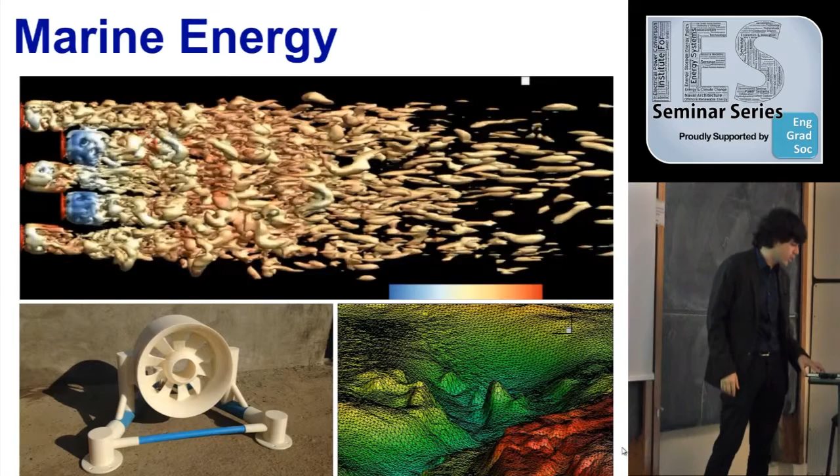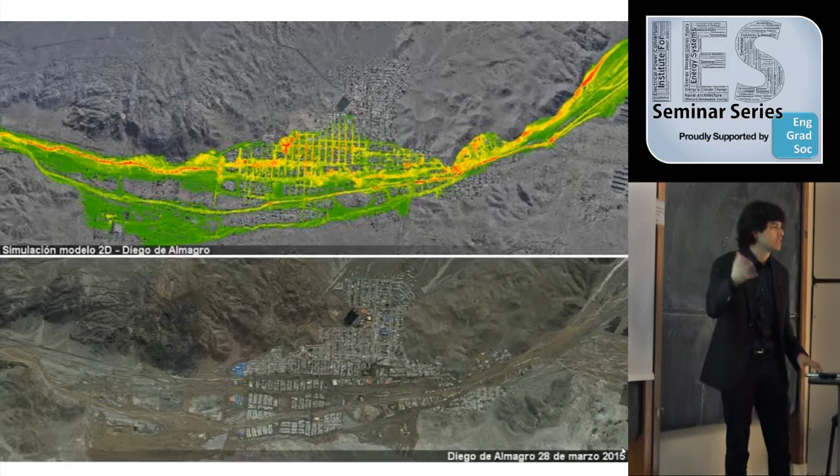So we did some forensic work to try to understand what had happened, from the meteorological point of view up to the propagation of the flood in the terrain. We have done some very cool experiments trying to understand the process, why all these towns got flooded, and what the consequences are. And this is the work we had initially planned. We have developed models to couple sediment transport and see how the city of Santiago is going to flood the next time something big comes.

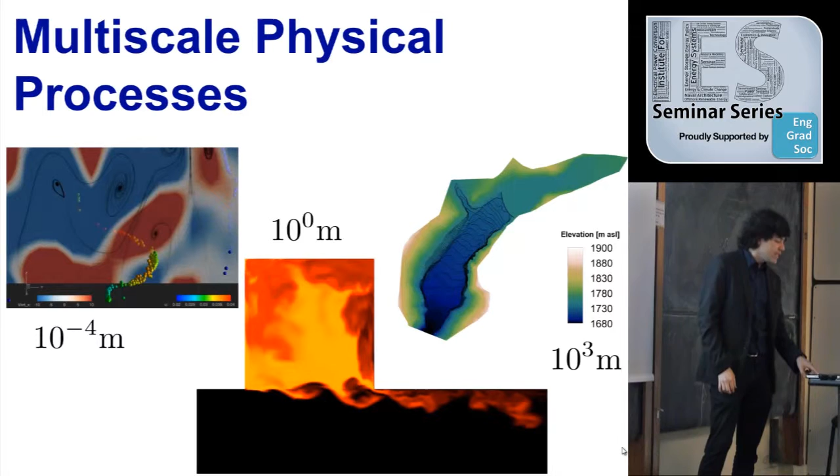So all this about particles started a long time ago. When I was doing my PhD, this was just my hobby. I started just because I liked it. I started investigating particle motion in flows that occur at low Reynolds numbers but have chaotic properties. This is not turbulence. These are even steady flows. Very simple flows, called von Karman flows, in which you have the lids in a cylinder rotating in different directions.

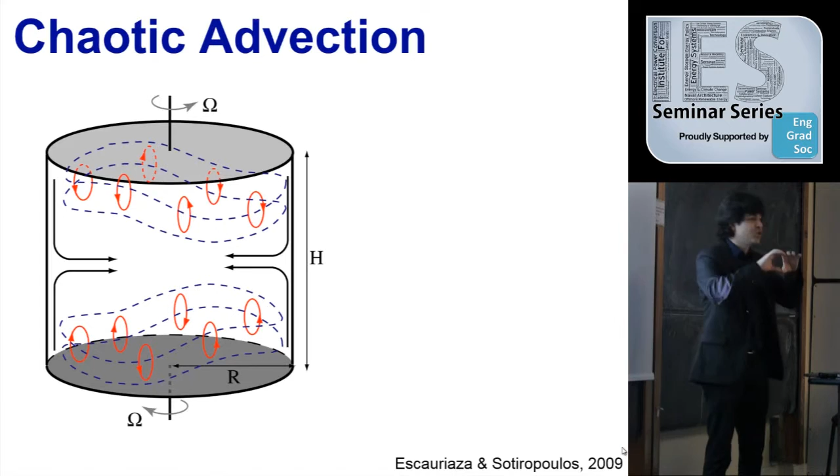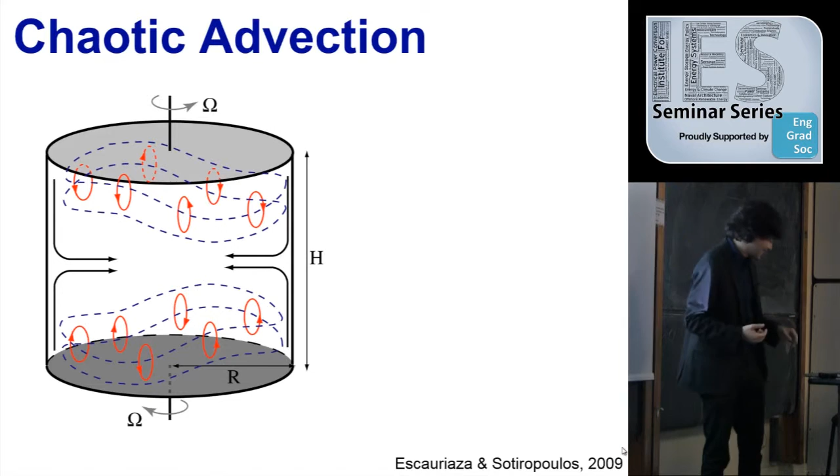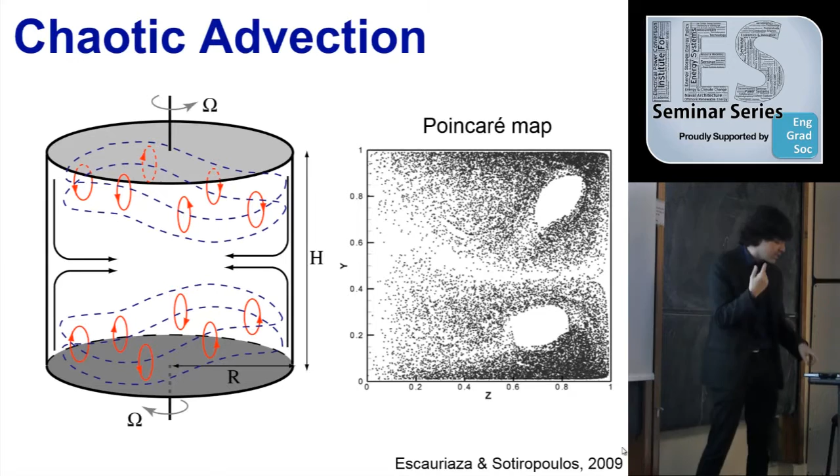So at some point, for a low Reynolds number, you develop this donut type of vortices, right? So the way of analyzing these flows is Lagrangian. So I started looking into, this had nothing to do with my thesis or what I was doing, I started looking at Lagrangian dynamics of particles in these chaotically advected flows. And you can start seeing, when you plot these Poincaré maps, every time a particle pierces this plane, you start seeing where the particles go, right?

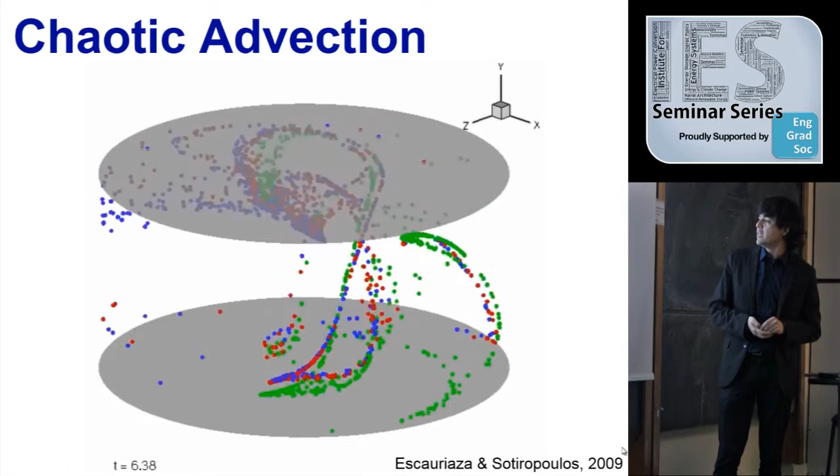So here I put particles of fluid, which are the blue particles, and the green and red have different properties in terms of inertia and weight. And you can see that there are some areas of the flow that have a large mixing capacity, even though it's not turbulence. And so you can use these flows to mix with great efficiency, even though you cannot produce turbulence.

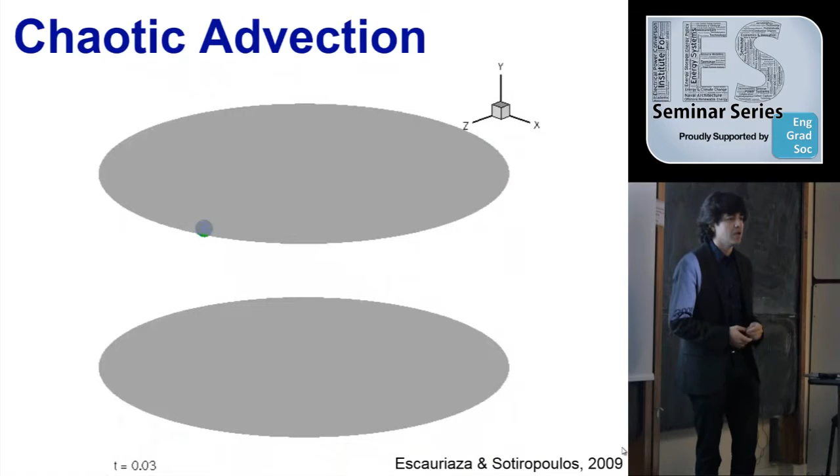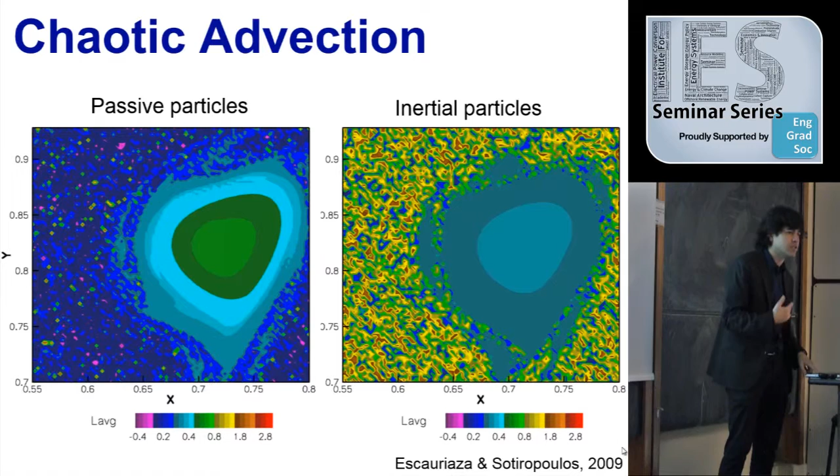So these toroidal vortices, these donuts, are a barrier to transport. So you can see that there are some integrable areas with no mixing in between this chaotic sea. Right? So we started looking into the dynamics of particles and how inertia and gravity produce changes in the dynamics of particles in these cases.

So then one of the things that we did, that's why the hybrid model started, the DES model started, is to look at the horseshoe vortex, which is the vortex that develops when you have a turbulent boundary layer and an obstacle, like a pile or something like that. The dynamics of this vortex, especially at high Reynolds numbers, is very, very complex.

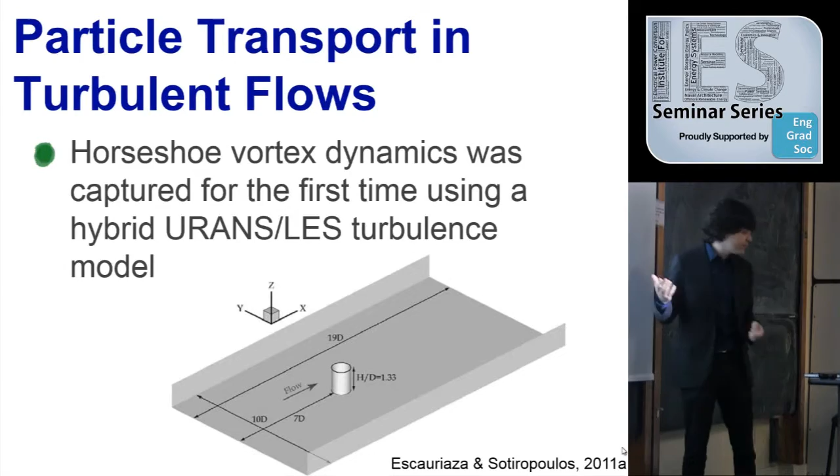And the only way to resolve this at real-life Reynolds numbers was to use a hybrid model, so we didn't have to resolve the tiny vortices of the boundary layer, but at the same time capture the dynamics of the vortex. So for the first time, using DES, we were able to understand the dynamics of the horseshoe vortex, which is comprised of several vortices that actually merge.

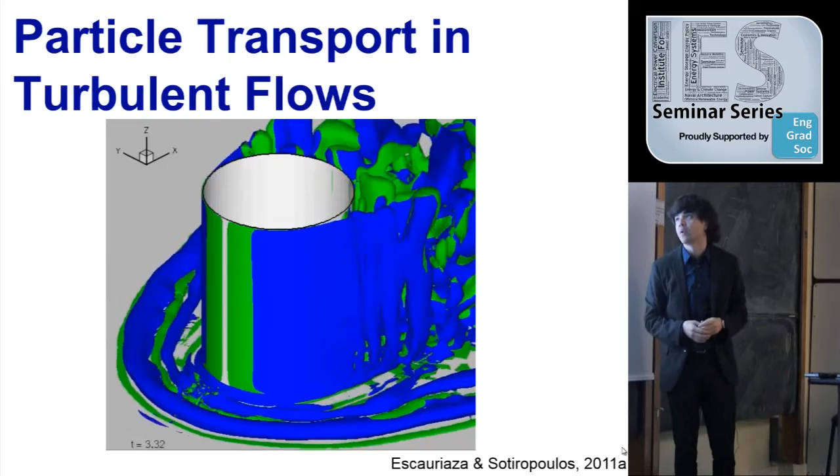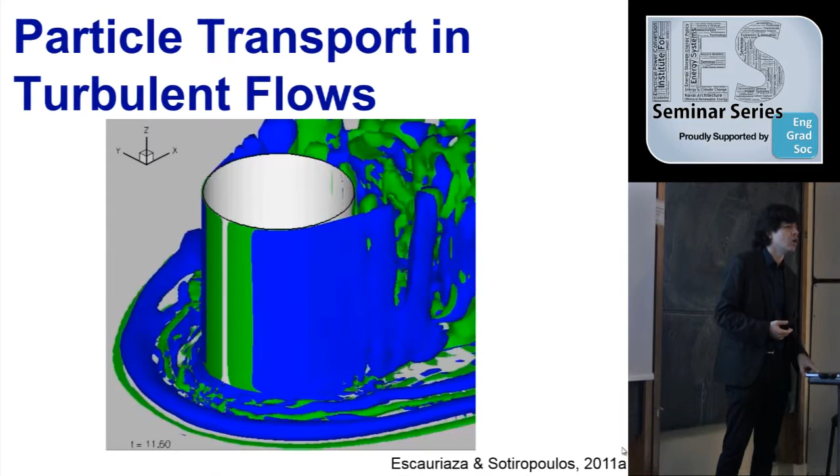In fact, there are some experiments in the 70s in the St. Anthony Falls lab at the University of Minnesota. There were experiments for a very, very low Shields parameter, and they waited a month, and you still had sediment transport.

So all this time, from the early 20th century, there has been this controversy between this vision, which is mostly what Bagnold and other people have developed, and Hans Albert Einstein, or Einstein Jr.'s vision, which is, you have to look at this problem as a probability problem. So what I did was I started looking into the dynamics of particles.

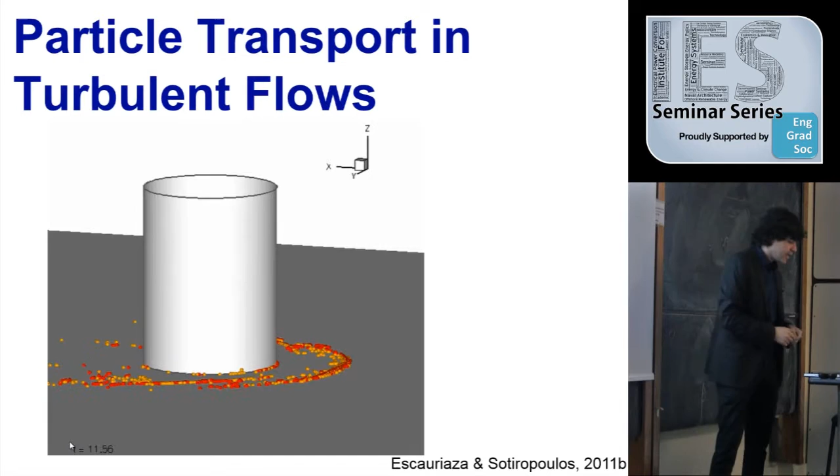So if we perform this simulation, you will see that the horseshoe vortex can actually transport the particles downstream, right? And move them. Obviously, the particles that get in the area outside the horseshoe vortex will not move because the turbulent boundary layer is not capable of mobilizing them. So one of the things that we realized is that, first of all, the transport becomes very intermittent. We're very close to the threshold of motion, to this critical Shields stress.

So groups of particles, and this is just a static figure to show you, groups of particles get detached and move, but sometimes nothing happens. There are particles that just slide on the bed or just remain there for a long, long time. And also, you get these streaks, which we were also able to reproduce, that a lot of experiments had seen: these particles get aligned on top of the bed under these conditions.

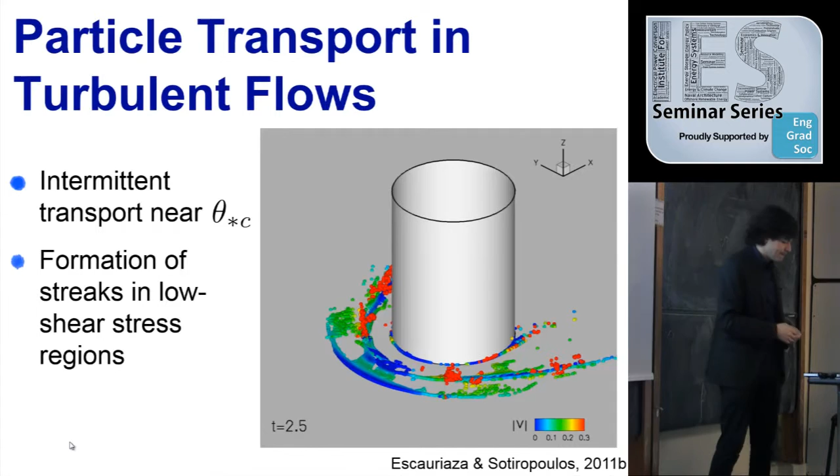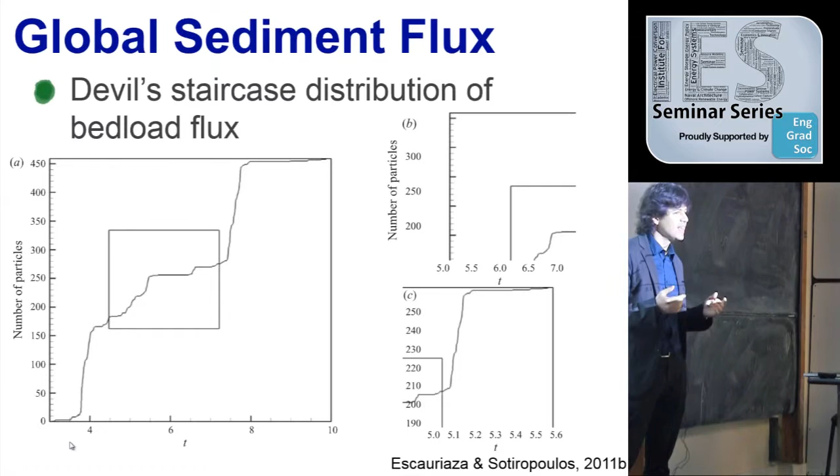So we decided to start counting particles. We defined a vertical plane and started counting how many particles cross that plane. What was the transport? Because that's what you actually can measure in the lab. And if you look at that, you see that there are huge transport events, but then there are periods where nothing happens. Silence. No particles are transported. Then you have smaller transport events, and then long periods where nothing happens, and everything is intermittent. And if you look closer at this, you see the self-similarity up to the resolution of one particle.

This is actually a well-known fractal curve based on the Cantor set. It's called the Devil's Staircase.

And I got really happy, because I work at the Catholic University of Chile and I get to work with the devil. So it's a lot of fun. This is the devil.

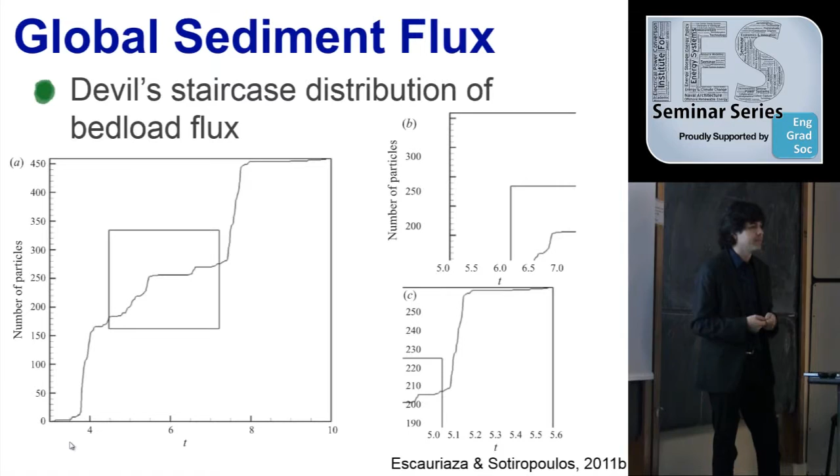You cannot actually fit a statistical distribution to this type of curves, right? It's a fractal, self-similar curve. So one of the things that we realize is that near the threshold of motion, bedload is very intermittent. If you look at what you actually can measure in the lab, bedload is very intermittent. These are the most common conditions in nature. You don't have a sheet flow of the entire bed all the time. Most of the time, the rivers are maintaining this condition very close to the critical.

And what happens really happens at different time scales and spatial scales, from the scale of the particle up to the formation of bed forms and all that. I don't have time right now to tell you, but from this Lagrangian analysis, we developed an Eulerian version of the same thing, and for the first time we coupled the bed with the horseshoe vortex, and we resolved bed forms for the first time in a 3D model. I can talk about that later, but it's not the purpose of this talk.

So now we wanted to understand what happens when you don't have a cylinder, but still the boundary layer can transport sediment. So the main objectives of this investigation were to understand the dynamics of the turbulent boundary layer and the interaction of the particles in a mobile bed. Now the boundary layer is performing the transport, not the horseshoe vortex, and we try to understand what are the mechanisms that produce intermittency and characterize the bedload flux in these conditions.

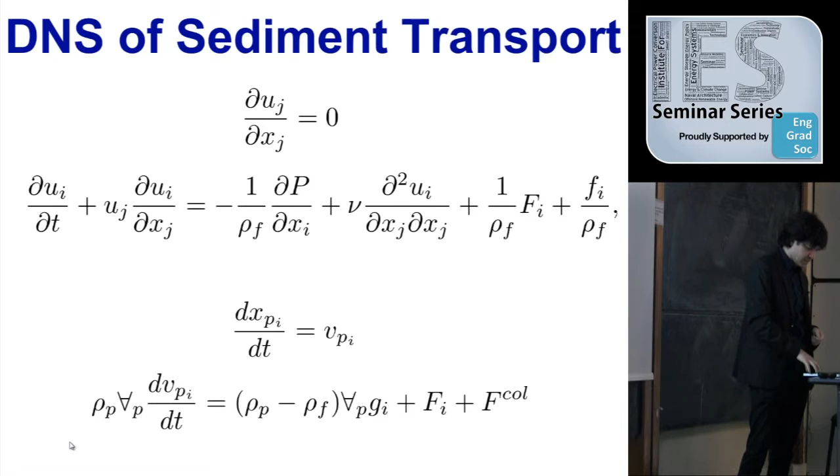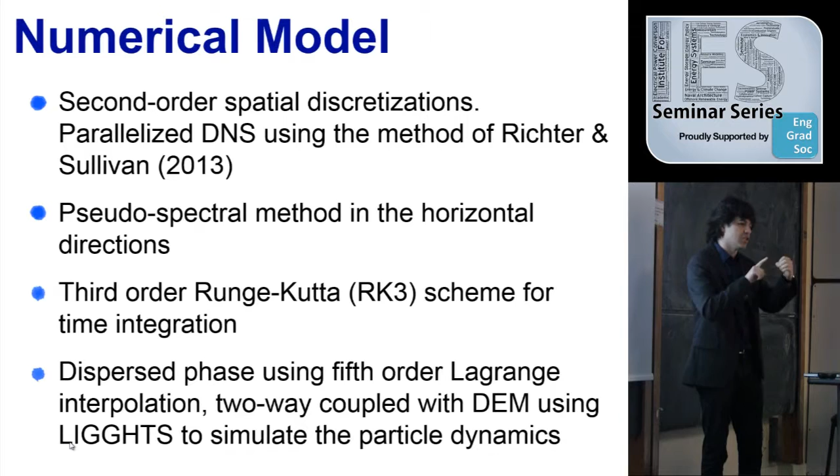So we developed this DNS model based on the method of Richter and Sullivan, which considers the spectral method in the horizontal directions and finite volume in the vertical. And in time we use a third-order Runge-Kutta scheme, and the particles are calculated with a fifth-order Lagrangian polynomial interpolation, and we use DEM, in which we consider the collision among particles with a scheme that dissipates the energy and gives you what happens after a collision in the tangential and normal direction.

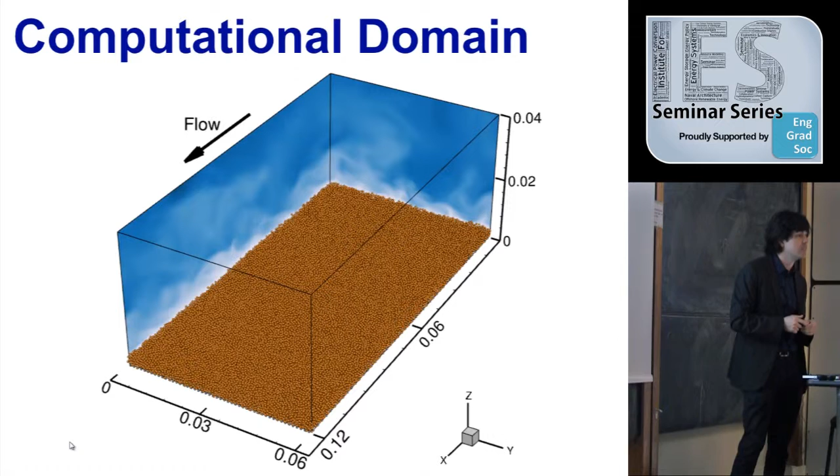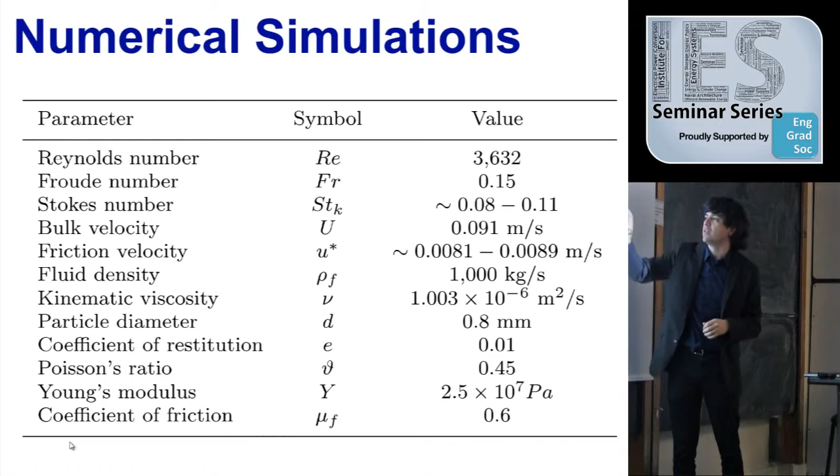So the simulations we carry out were in a very... DNS is very, very expensive. So this is the largest domain we could handle, 4 centimeters tall. These are the horizontal directions, and we have 50,000 particles in this case, just laid on the bed, right? So under these conditions, we can only get to a Reynolds number of around 3600. These are the other conditions of the particles, the coefficient of restitution and Poisson of the particles' collisions, the density of the particles on the fluid, the Stokes number, and all the characteristics that define this case in particular.

So what we tried to do was to, this is again the Shields diagram. Don't care about this. This was only just to check how the model was working. But we fixed the Reynolds number of the particles, and we tried different values of the Shields number around the curve given by Shields.

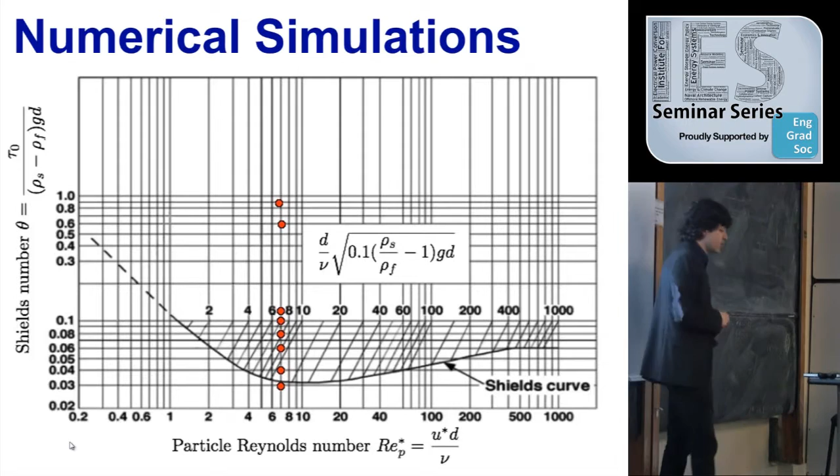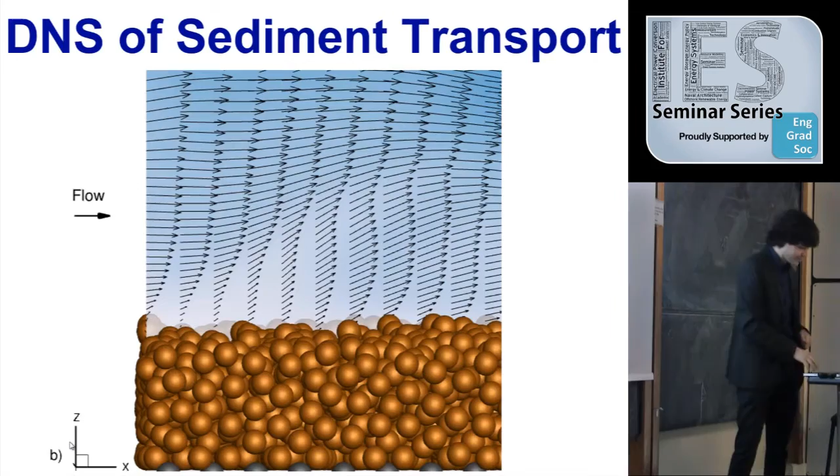So in each flow, we resolve the flow on top of this particle layer, and actually see what happens. I forgot to tell you, but the lateral boundary conditions are all periodic. So any particle that comes out gets seen immediately upstream. Right? It's like modeling a small stump on a riverbed. So we can resolve now. This was one of the first simulations we carried out. The next one you're going to see is

this is faster, because it's really boring to see particles moving every 2 minutes. But what happens is that the particles get trapped in these protective pockets inside the bed. So they start vibrating, and then they jump, and you see how this intermittent bedload transport develops. So we were able to look now at the coupled flow and particles. All the particles that are gray are not moving, have zero velocity. So when you have these hairpin vortices developing at the boundary layer, when they get up, they allow faster fluid to rush near the bed. So you have this transport event in which groups of particles are transported downstream as the flow develops.

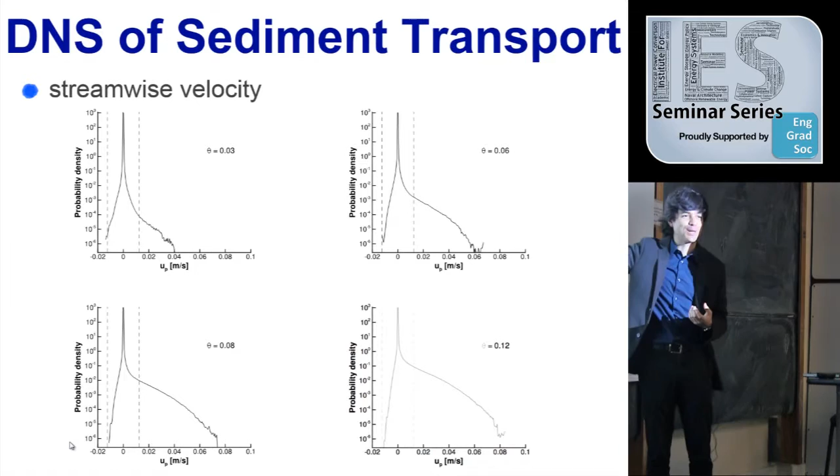So, oops, it doesn't show very well, but this is for different Shields parameters. We started looking into the statistics of particles, seeing how the streamwise velocity of the particles started increasing as a function of the Shields parameter. You will see here that we had to set up a threshold to analyze this, because negative velocity is when the particles start bouncing before jumping. So the backward motion of the particle is captured by the histogram in this case. Then we have what is called the activity on the bed, which is the total number of particles in motion at every instant in time.

The thing is that Albert Shields left his thesis abandoned in Germany, and then Hunter Rouse, who was the director of the lab in Iowa, found it, translated it, and made it famous. Everyone now uses the Shields diagram, and Shields didn't even know. He knew many, many years later.

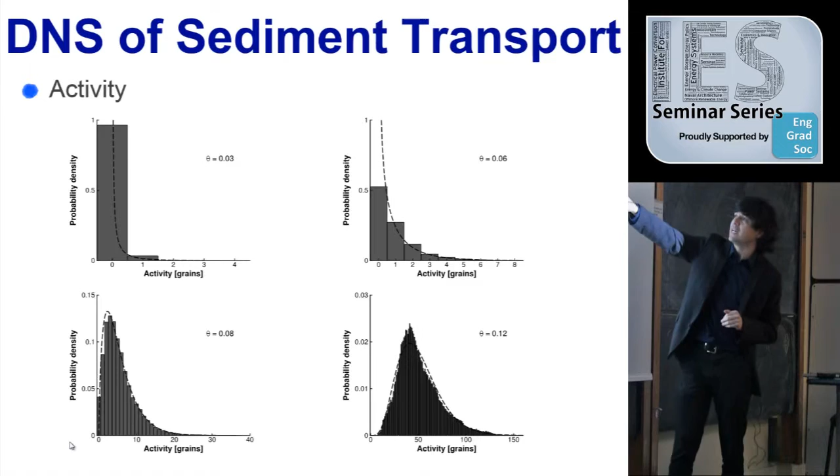So I imagine Shields defining at what point you decide that this is the initiation of motion, right? When the first particle moves, or when a significant number of particles are moving, or when the entire bed is moving. That's really difficult to define. Actually, I really think it's impossible in this case. But you start seeing how the behavior changes. When the Shields parameter is very low, basically no particles are moving at the same time on the bed. As the Shields number increases, you start having a distribution of particles that are moving.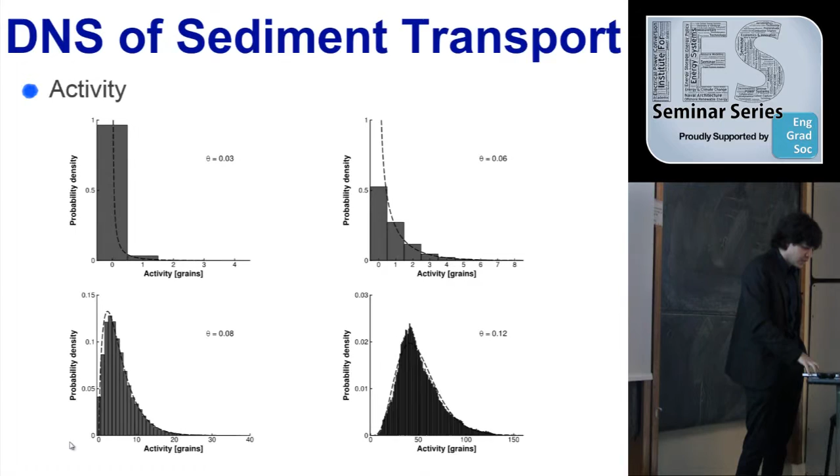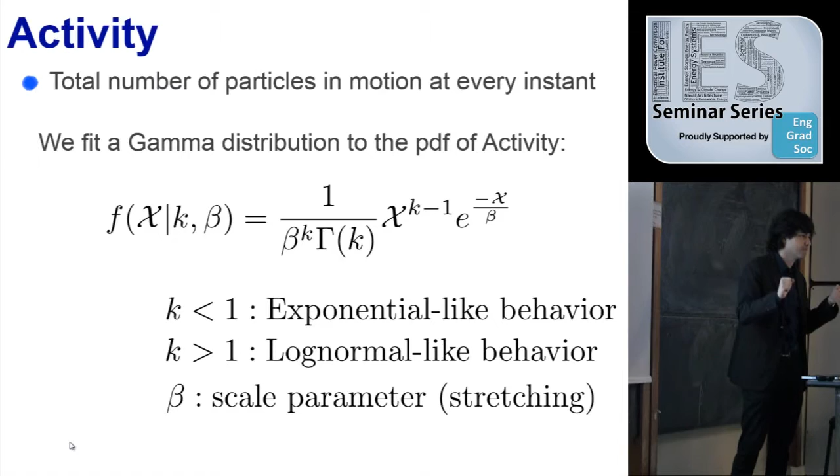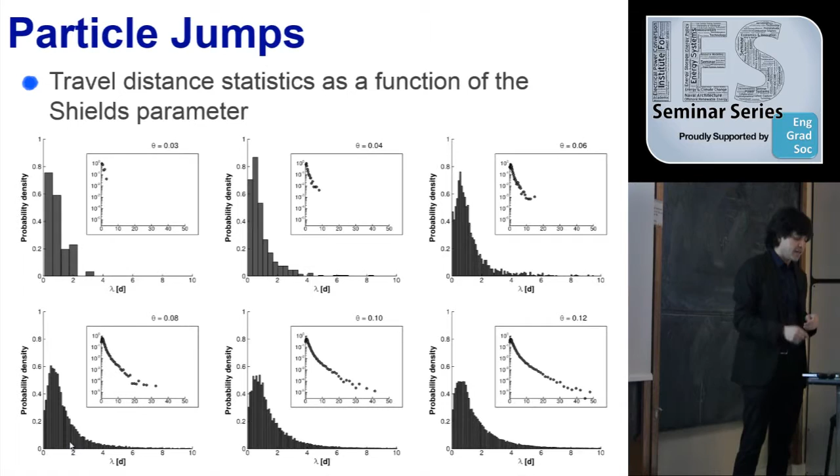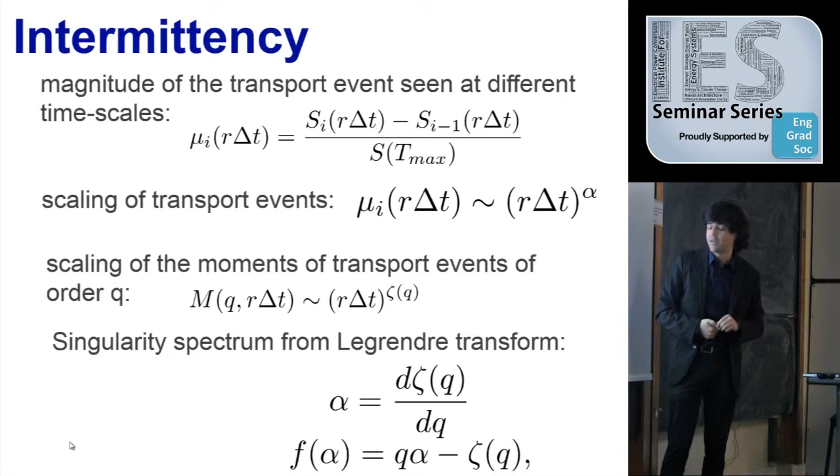So if you define the magnitude of an event as the mass between two steps of the staircase, you can analyze this at different time scales, and you can see if there's a scaling relationship. Actually, this is what is called the fractal dimension of the transport event magnitude. The moments of this transport event magnitude are related to what is called the multifractal spectrum of transport. The moments are related to the singularity of the multifractal spectrum through what is called the Legendre transform.

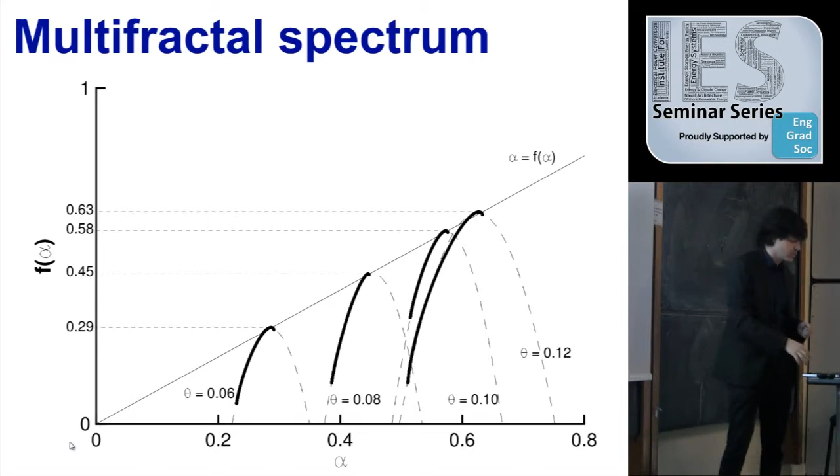So it's really difficult to identify initiation of motion, but at least you can say it will be in an intermittent regime, or you will always have one particle exiting. It will seem continuous, which means that the fractal dimension is equal to 1, at least in these conditions.

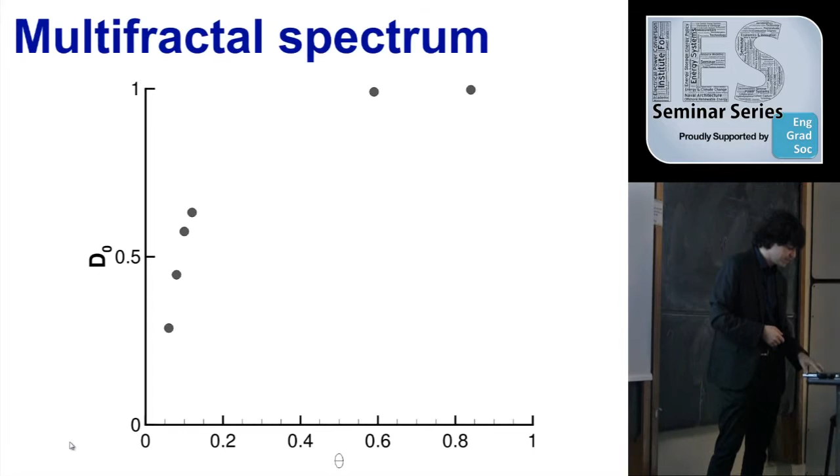So in conclusion, we used a two-way coupling in which we combine DNS and DEM to analyze the dynamics of sediment transport, try to characterize the transport with the Shields parameter, and see how the properties of the sediment flux change under these conditions, with different characteristics through which we can describe the sediment transport flux. And this is actually the first time that we have been able to connect all these loose ends.

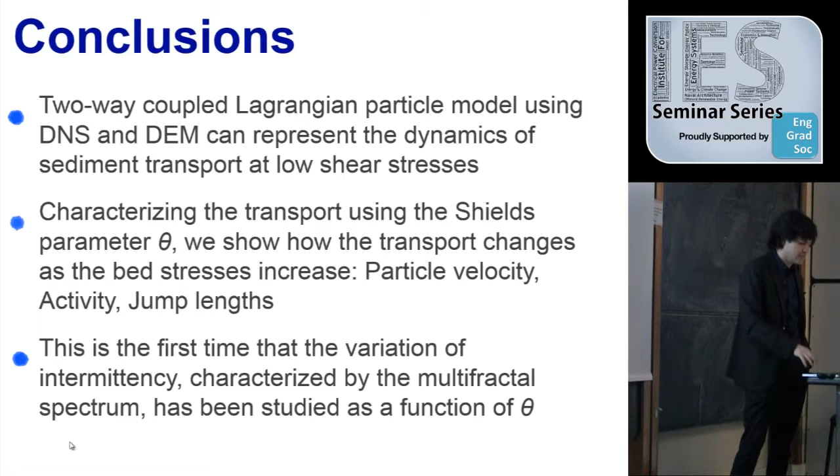So in the future, what we expect to do is to incorporate, for instance, different sediment diameters. What is the effect? Some of these things have been done in experiments, but what is the effect of having a bimodal distribution of sediment diameter? What are the effects on the initiation of motion, on the intermittency of transport? That's something that we now can do with this model. See what are the real parameters that determine the transport regime. Is it the Shields parameter only, or will it depend on the Stokes number of the particle, on the Reynolds number of the flow, on the D star, which is a non-dimensional diameter of the sediments?

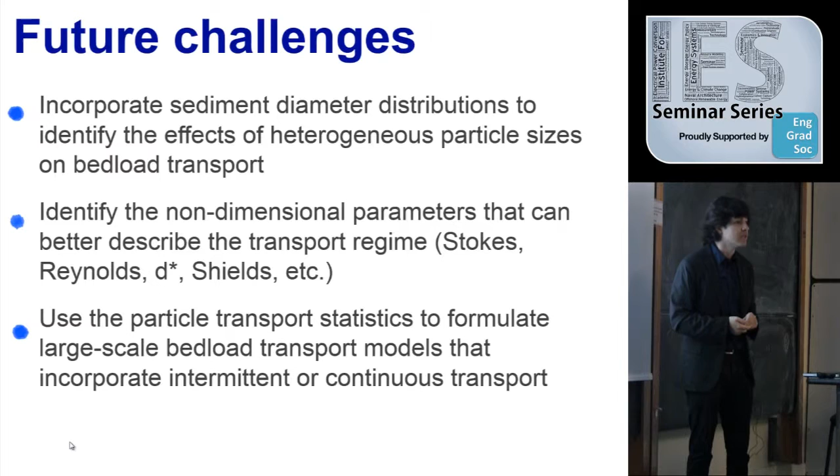And then, the long-term objective is to see if we can use this information to improve the prediction of sediment transport in real conditions. See if there's something missing that we can add and improve the prediction of bedload transport that is actually used in real flows. Thank you very much for your attention.